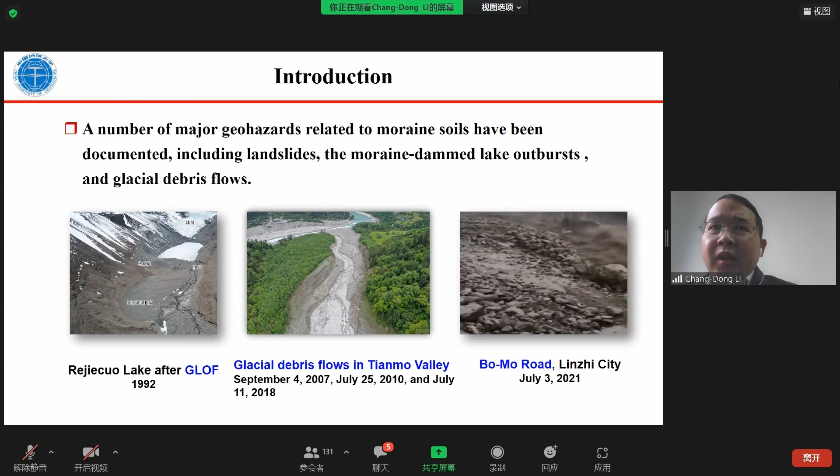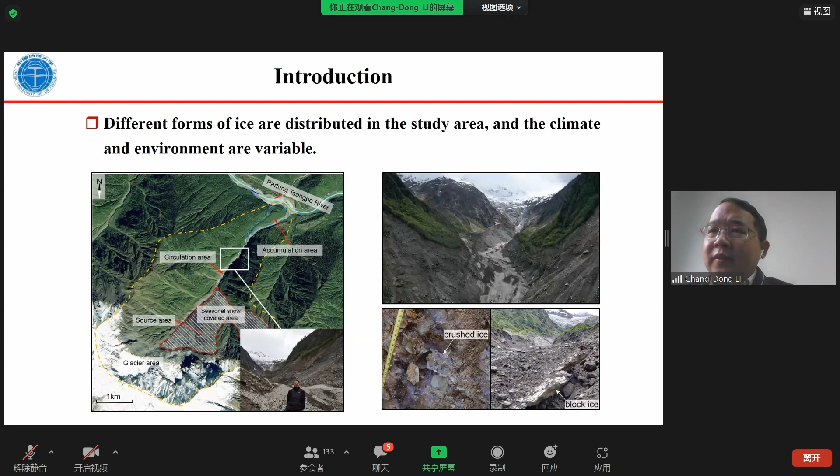Another important finding is that in the Tianmo Valley, we often see the ice covering the soil. But sometimes the ice is mixed with the soil together, and the ice has two very obviously different types. One is crushed ice, in these pictures, my mouse can show the crushed ice. Another is block ice. This can be found in the Tianmo Valley. So in the following research, we focus on crushed ice and block ice in the moraine soil's characteristics.

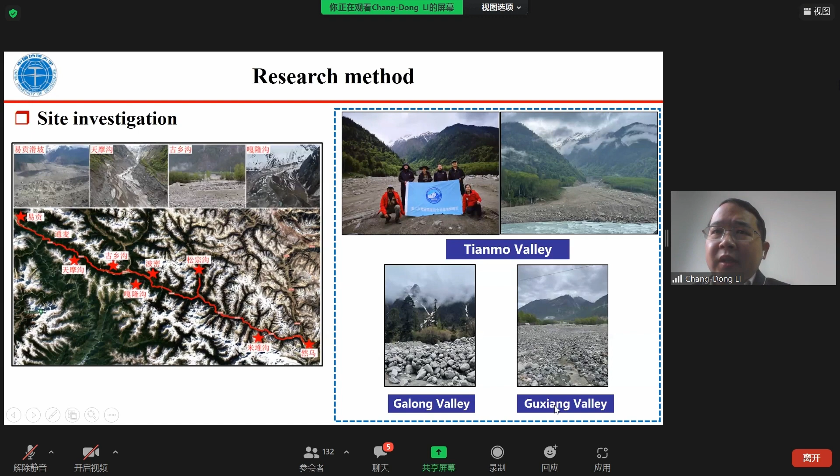This is the upper area of the source area of the Galong Valley with glacier area, and the right one is the Tianmo Valley with glacier area.

We have also conducted some in-situ tests. In-situ testing is very important to get real data for the laboratory tests and further studies. First, we conducted an in-situ CPT test to investigate the CPT properties of the moraine soil. Another is the site earth temperature test.

Because the temperature varies with different depths, the working conditions during the investigation were very harsh. The water is very cold, and we used UAV investigation equipment to help us. But since the temperature is very cold, transporting equipment from the entrance to the source area was very difficult.

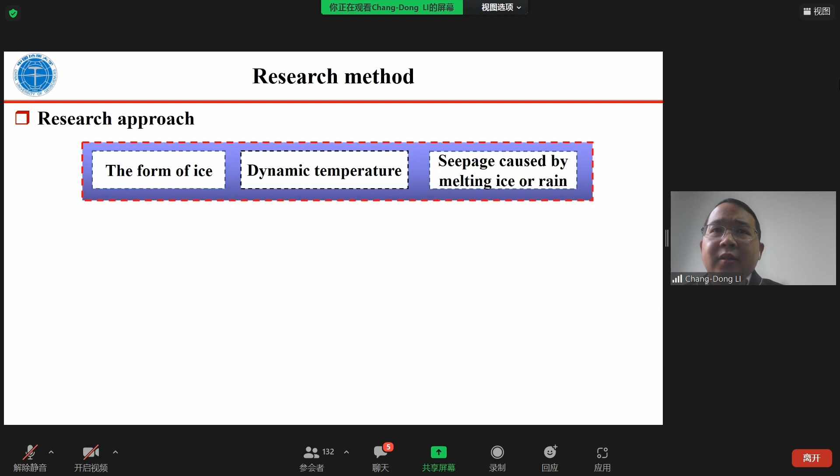We also used test equipment, which is very important. This was conducted in Chengdu. This is the form of ice.

As I mentioned, one is the crushed ice, the other is the block ice. And we used the equipment in...

Chengdu, where we worked with the help of Dr. Wang Jiao and Dr. Chen Xiangqing on the equipment together.

This equipment is a tri-axial test that can consider temperature, stress, and seepage together. So we considered the form of ice, the dynamic temperature, and also the seepage caused by the melting ice.

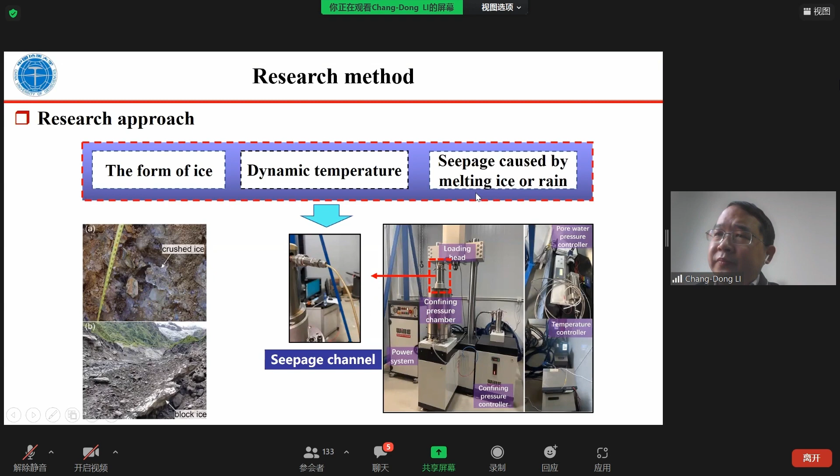This is the test soil and samples. One is the sampling with crushed ice, the next is the sample with block ice. This is the block of ice mixed together.

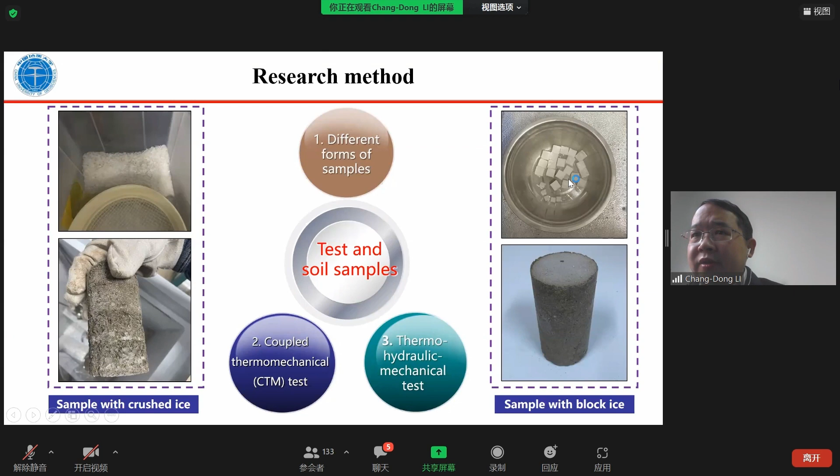The third part is about the strength characteristics. We have done two kinds of tests: one is the stress-strain curves, and the triaxial constant strain rate test.

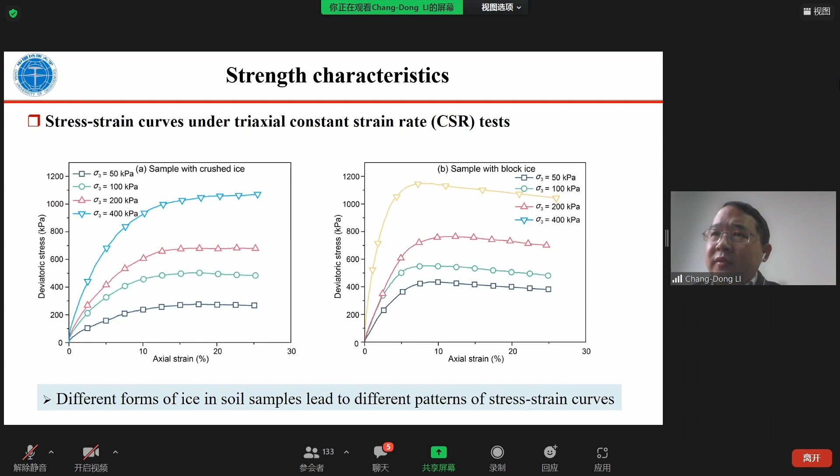In every test we compared crushed ice with moraine soil and block ice with moraine soil. We can see that different forms of ice in the soil samples lead to different patterns of stress-strain curves, and also different strength parameters.

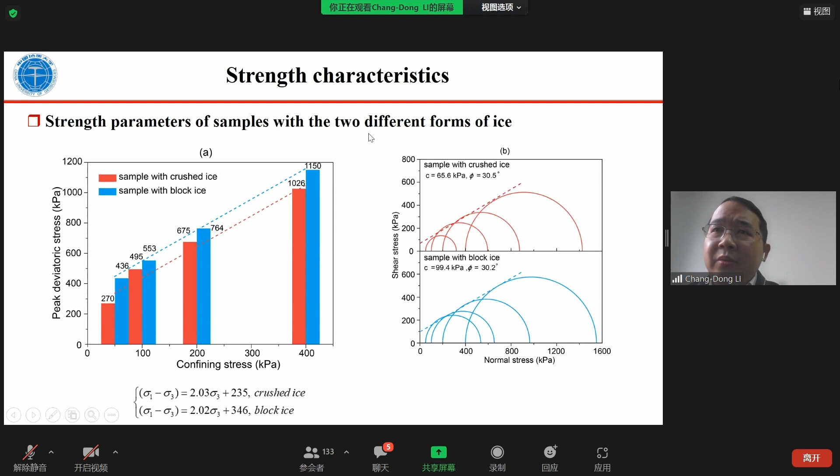We can see that the samples with crushed ice, shown in red, and the samples with block ice, shown in blue - the blue is higher than all the samples with crushed ice.

Another aspect is the failure patterns of soil samples after the CSR test. The samples with crushed ice, because crushed ice mixed with marine soil is almost similar to a homogeneous sample. But if mixed with block ice, it will be different, as we have seen.

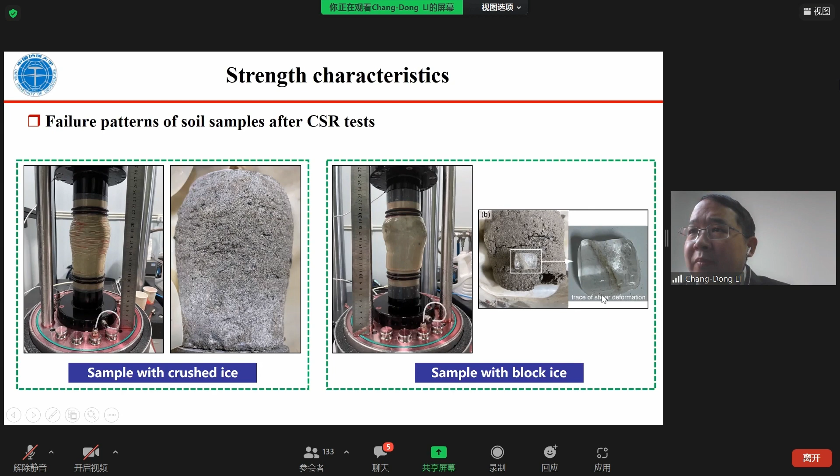After failure, we can see the block remains because the ice block has very high strength.

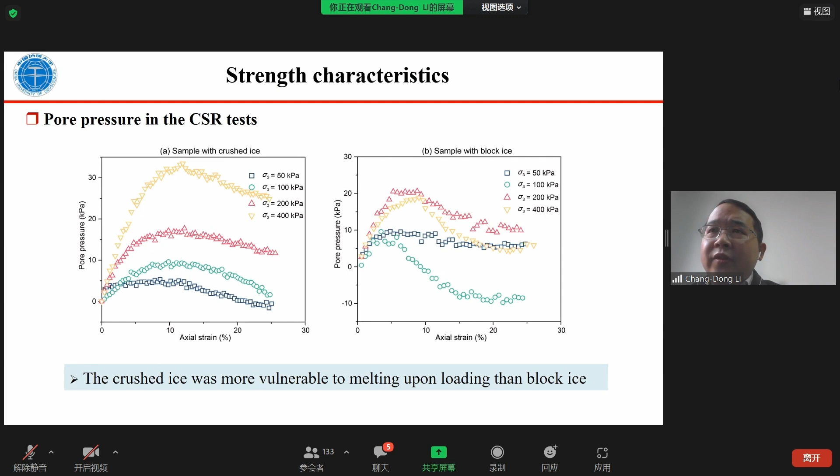We also collected pore pressure data in the CSR test. The crushed ice was more vulnerable to melting upon loading compared to block ice. During the test process, the ice melted into water, resulting in different seepage and pore pressure patterns.

Now I will talk about the multi-field coupling research. The tests I just mentioned considered temperature and stress and also pore pressure, so we could conduct extra comparisons.

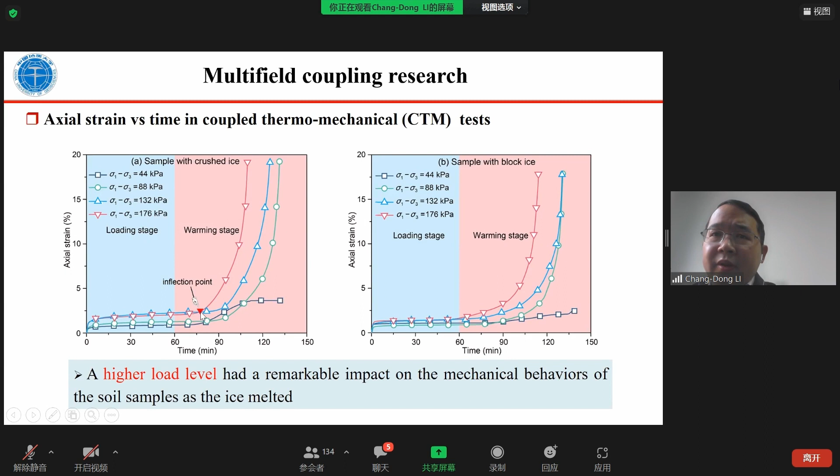We can compare this with the thermal-mechanical test together. From the test results, we can see that a higher load level had a remarkable impact on the mechanical behaviors of soil samples as the ice melted, and we observed a very obvious threshold point, an inflection point.

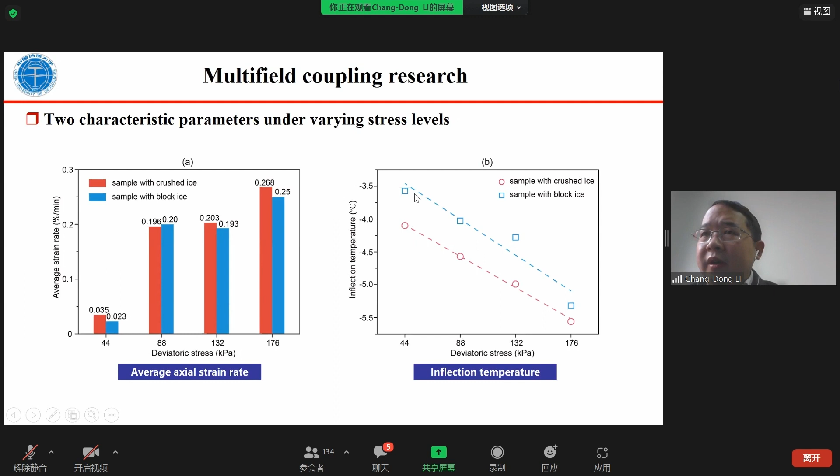Under varying stress levels, we can see two characteristic parameters: the left one is the average axial strain rate, and the right one is the inflection temperature. We have done a lot of tests, so the test results are relatively good.

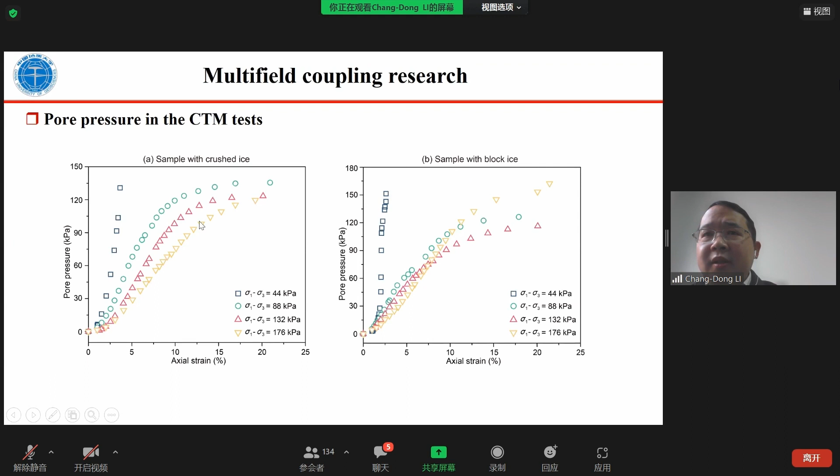We have also done the pore pressure in the CTM test. In this test, we necessarily use the sample with crushed ice and the sample with block ice. We have some different patterns together, and stress.

We have also tried three geophysical tests together: stress, temperature, and seepage coupling test together. It's common to do the stress-temperature test before for some kind of similar soil, but the three kinds together—stress, temperature, and seepage coupling—that is maybe very difficult. We tried many tests, and we succeeded in doing the test.

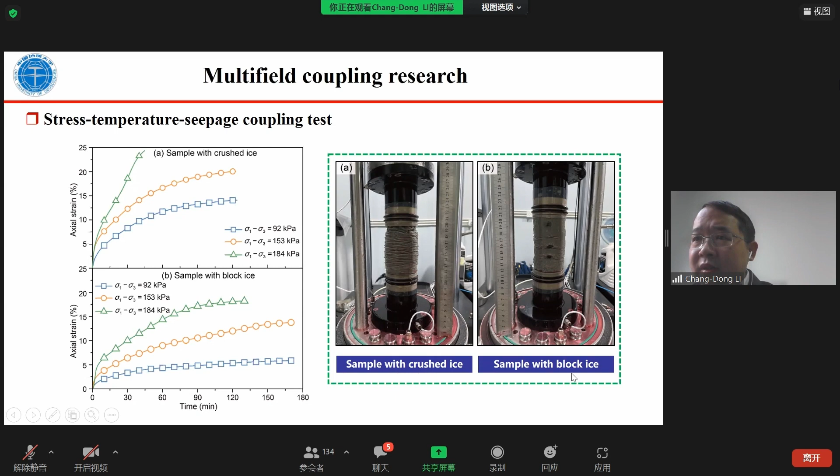This is the sampling with the crushed ice on the left, and the sampling with block ice is the right one.

Last, I'll give the discussion and conclusions. The influence of ice form on the strength of marine soils has very different features. The sampling with crushed ice can be almost like the homogeneous marine soil, shown on the left. But the trace of the shear deformation with block ice is quite different.

We can see they have a very serious effect from the block ice in the test. The soil containing block ice was of higher strength than that of soil with crushed ice. This is the graph, the curve we presented before, and also the large ice blocks can undertake part of the load.

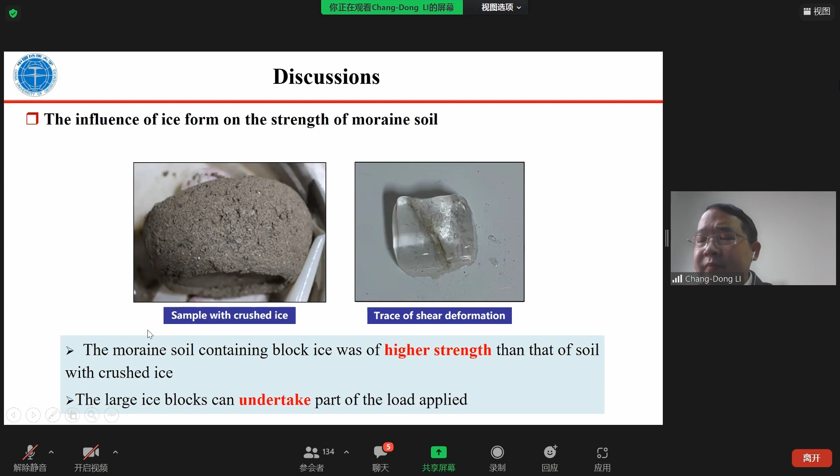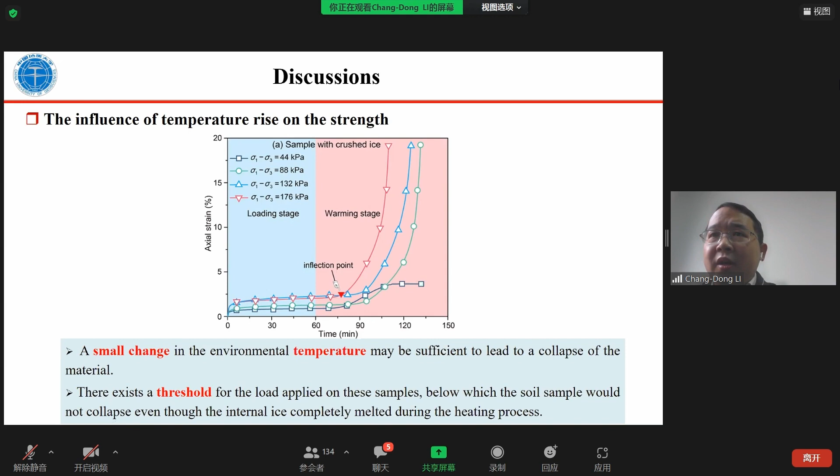There is a threshold for the load applied on these samples, below which the soil samples would not collapse even though the internal ice completely melted during the heating process. This test is also the first time with stress, temperature, and seepage combined together for moraine soil.

We also talk about the influence of meltwater on the mechanical behaviors. The samples from crushed ice on the left, and the right one is the samples with block ice, show some very different features. We can notice that in the right one, because the ice blocks are at different depths, we have seen some holes. The hole locations are the positions left by the block ice.

A comparison of the strain rate and the collapse time between the samples with different ice forms again demonstrates a higher mechanical property for the sample containing block ice.

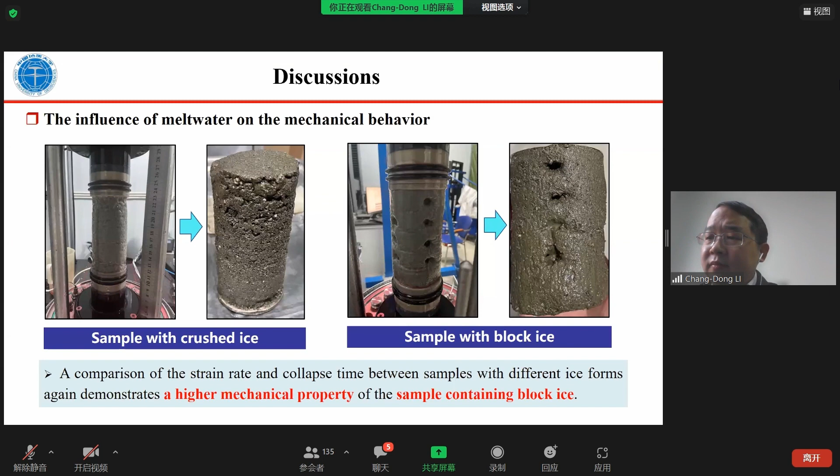I also conducted investigations with my three graduate students in the Tianmo Valley, near the 318 national road, and this is the Parlung Zangbo River. This is Tianmo Valley, and above it is a glacier.

Second, the stress-strain curves of samples with crushed ice and block ice are different: one shows strain hardening behavior, and the other shows strain softening behavior. The strength of the sample with block ice is higher than that of the corresponding sample with crushed ice, which is mainly affected by large ice blocks.

Third, through the thermomechanical coupling experiments, we found that there is a threshold stress. When the stress applied to the sample is above the threshold, the temperature rise plays a dominant role.

Lastly, the inflection temperature is linearly related to the axial stress. For moraine soil that sustains a higher level of load, it is more sensitive to ambient temperature fluctuation. This work was published in Engineering Geology in 2022.

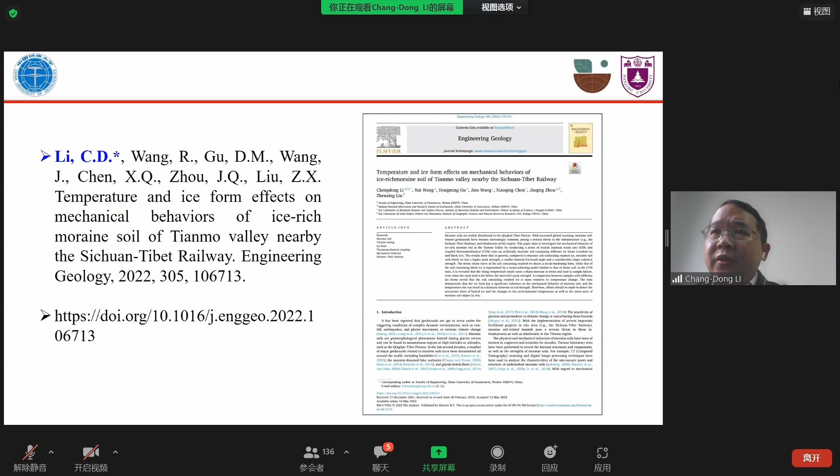So if you are interested, you can look at this paper in detail. Thanks for your attention.